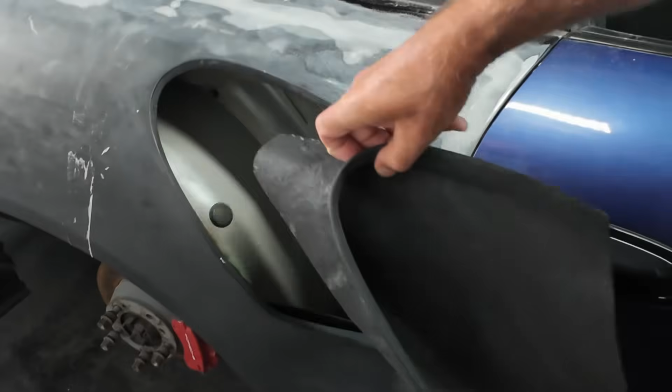And this is my list. Now, I can't write to save my life, so sorry about the scribbling here, but I can read it. So I've got a few things crossed off. We've seen them in previous videos. So at the moment, I need to bond in the air intake. So these are these things here, which go on the side rear quarters. Now I can't do that until I get them back from the body shop. These are going to be done in a satin black, and I'll bond them in, but I just need to make sure they fit correctly. So I've got a little bit of work on them just to make sure they're fitting nicely before I give them to the body shop.

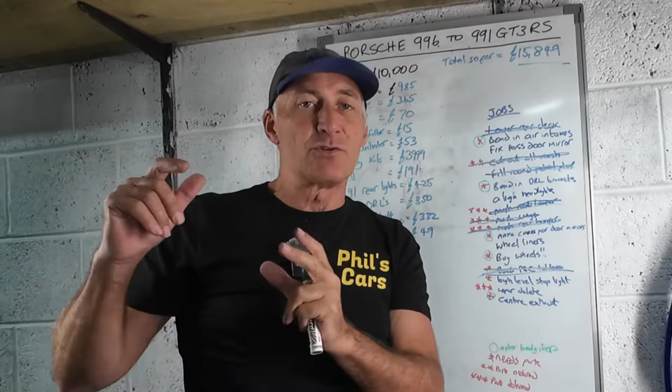Now I've got fix passenger door mirror. That's just a little bit of work I've got to do on the passenger door mirror. It's just a little bit wobbly. The bracket I made for those, if you remember, look back for a previous episode, is really good on the driver's side, but just a little bit wobbly on the passenger side. So I just need a little bit of bend in that bracket, and that should fix that issue. Bonding the DRL brackets. Now I mentioned that when I was looking at the front bumper, I'm not going to bond them in until I come back from body shop, because they'll just be in the way of them spraying the bumper.

Align headlights. Well, I've been waiting for this. I needed to get the long 997 type tool that is used to insert and remove the headlights. The one you get with 996 is shorter. If you remember, 996 headlights have the runny egg part, so they are a bit wider than 997, so you need a shorter tool, and that didn't work on this car because I've got 997 type headlights on it. But I do have that tool, and that's one job I can do.

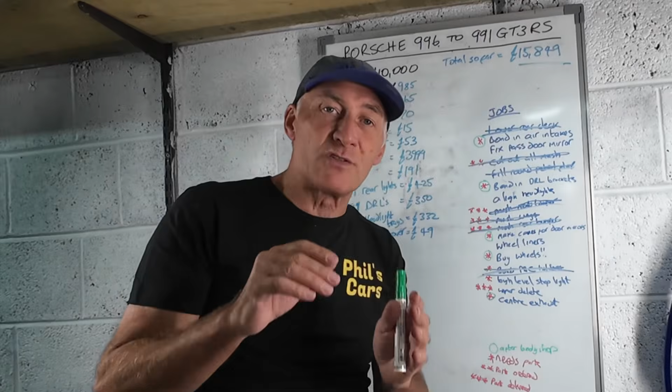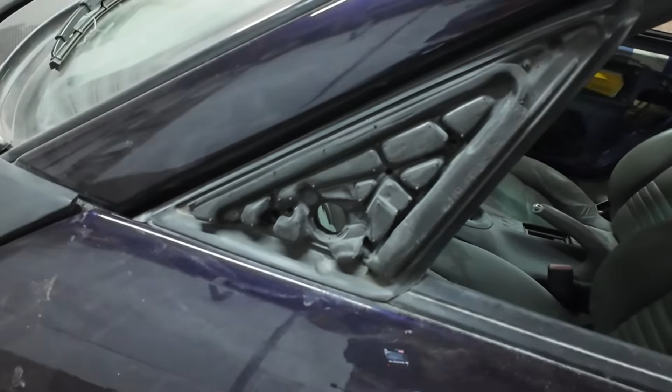I've got make covers for the door mirrors, so this is where the original door mirrors went on the car. I need to make some little perspex covers that go over them and give them again to the body shop to do satin black. Now I haven't bought that perspex yet. I'm still looking at that, and that's going to be a job just a little bit in the future, but I've still got plenty of weeks left to do that.

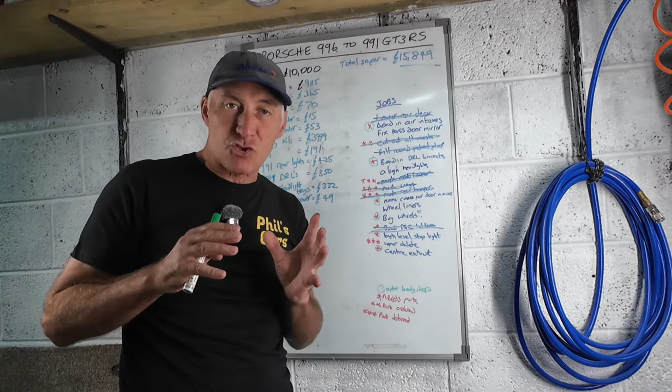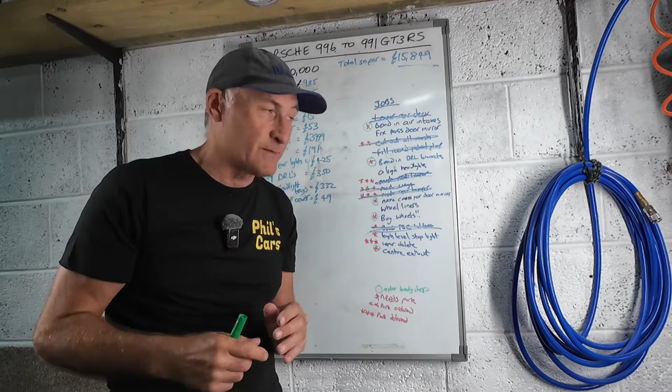Wheel liners. Now I do need to get the wheel liners out of my storage and try them on this car just to see what they're going to work like, because again, if they're a bit short, I may need to use some thinner perspex to elongate those, make them a little bit longer so they come to the wheel arches. Buy wheels, that's a big one there. I'm still debating which wheels to get. I'm not in a hurry at the moment because I can bang on the original wheels to get this to the body shop, so that'll be a post body shop job.

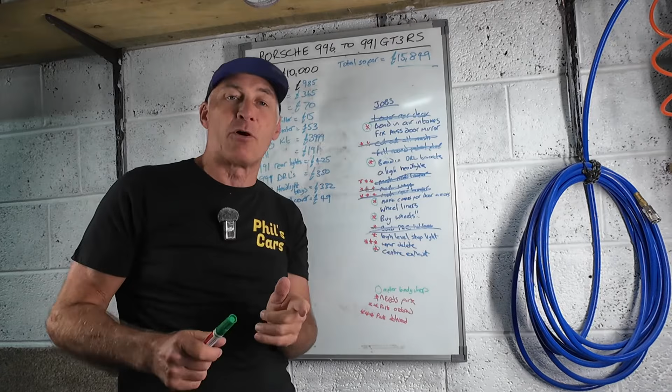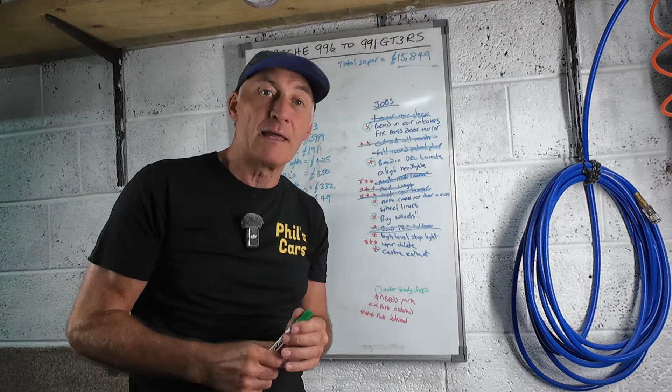High level stoplight. Now that fits into the wing and it is a different shape to the standard 996 high level stoplight. I've contacted the makers of the kit to ask them what stoplight is supposed to fit in there, because the 996 one doesn't. I'm waiting for their reply. Hopefully they'll just tell me which one it is, I go buy one and it fits perfectly in there. I'll just have to do a little bit of wiring. Wiper delete. Now this is a job I forgot about, to be honest, so I just read my board.

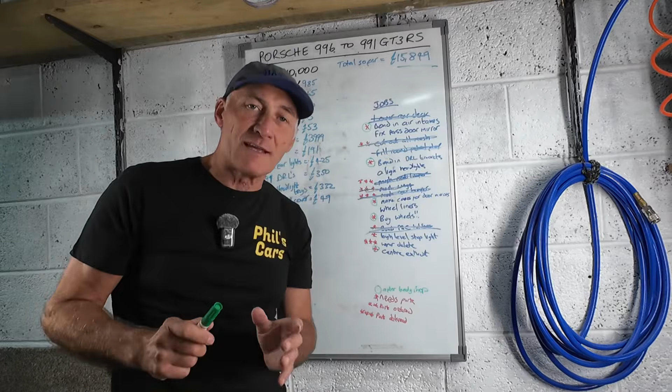So I'm removing the rear wiper on this car because you don't have one of them on a GT3 RS. So that's another little job we can get done hopefully in this video and get that prepped for the body shop. And the last one on my list here is centre exhaust. So we're going to drive this car to an exhaust manufacturer in this area who can actually make one for me while I kind of stand there and wait. So that's again a post body shop job, I am thinking.

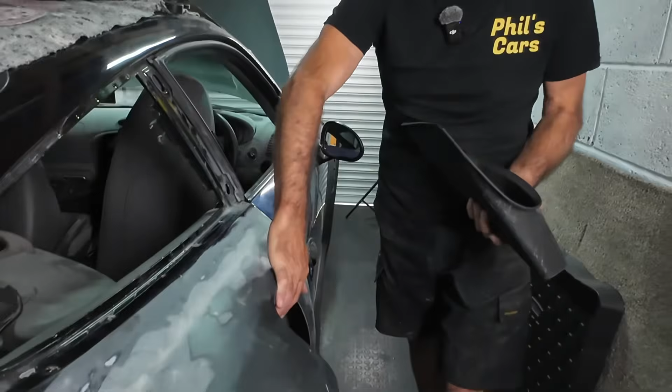So there we go. I've got a list of jobs that I can be doing on this car, hopefully in this video, to get it that one step nearer to the body shop. And now let's have a look at these air intakes. Now, two jobs to do on these. One, I've got to make sure they just fit nicely onto the hole in the actual panel here, and two, they've got a big hole in them.

So I'm really going to have to seal up that hole because I don't want anything going in here, because if anything goes through there, it's going to end up inside my rear wheel arch. So that is going to have to be sealed. And when I bond these on, I'm going to have to bond all the way around to make sure they seal this hole up. But initially, let's just try the fitment.

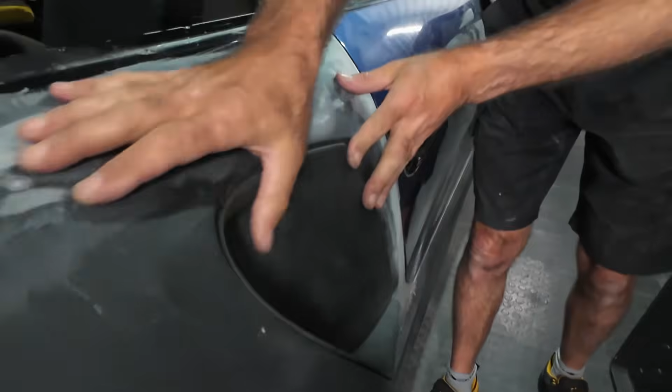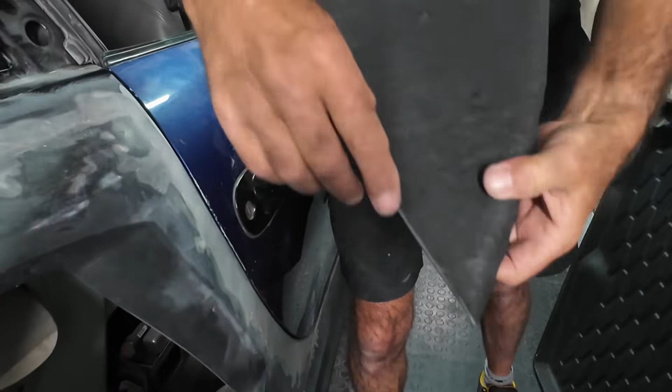So fitting them in, they do fit fairly well, but what we do have is a problem down here. This is sticking out, just sticking out a little bit at the end here. And what it is, on the inside of this there's just a little bit of a raised edge, so I'm just going to sand that down a little bit. I'm going to mess around with this just so it fits nicely.

So what I'm going to do now, I'm just going to get some clamps and do some test clamping of how I'm going to do this when it's come back from the body shop, because I can't bond these on until after they've painted the rear quarters. Otherwise they'll just be in the way, because these need to be a satin black colour, so they're going to have to be painted separately. So let me get my clamps and we'll test clamp this.

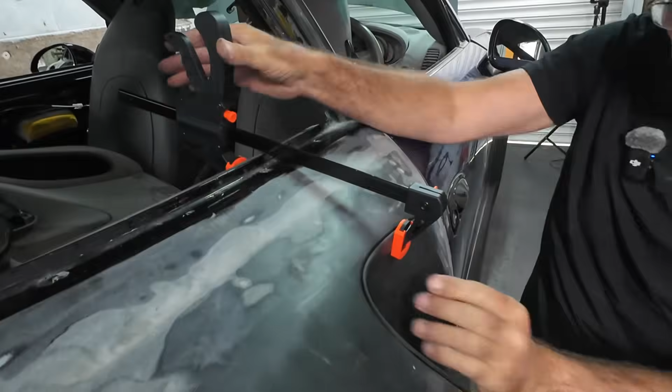Quite happy there. I think that's looking okay. And what I'll do, I'll probably put a piece of wood on the day between there and there, just to push that in to get the good bond at this side as well. That's that side, happy with that. So when we get back from the paint shop, we can bond that on. Let's go check the other side.

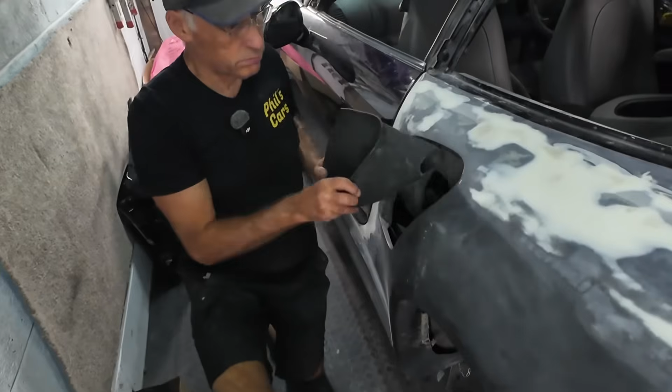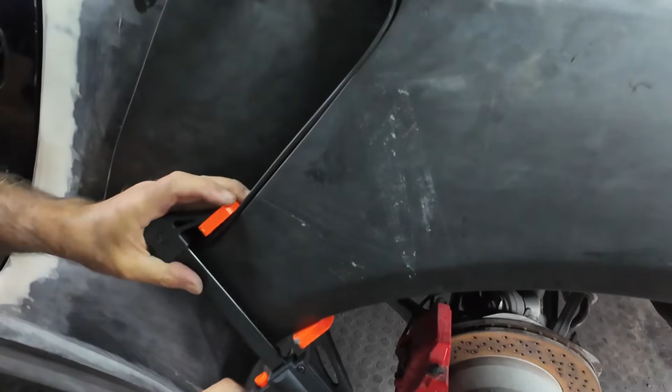Yeah, fits a lot better, I think. Yeah. And that's that one done as well. Happy with those now. So that's another job ticked off the list. On to the next one.

Right, so this is the job I've been putting off for a long time now, and that's looking at these headlights, because they're a bit of a pain in the backside. But I did manage to get the tool, which is a 997 headlight tool, because obviously these are more like 997 headlights now, and the one that you get with the car is only about that long and will not work on these headlights.

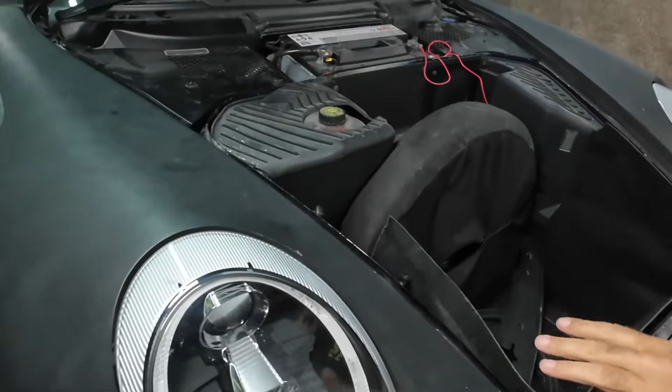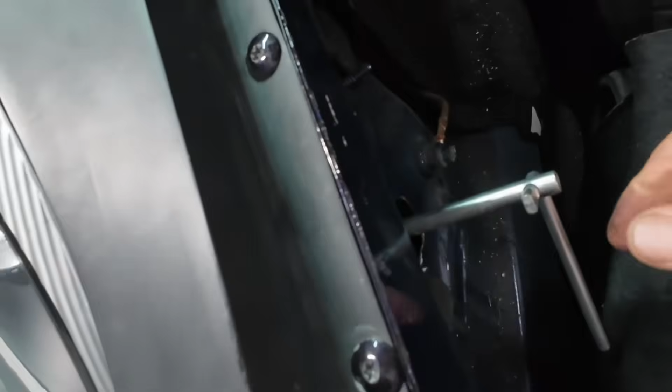Now, I had a little play off camera, and I've managed to get this one headlight here fitting absolutely perfectly. So that does fit nicely, and the tool does work. So the tool does fit into there, and you can get it on and you can release these lights and you can pop them in and out. But as for this one, it's a pain in the backside. This is the closest I can get this up to now.

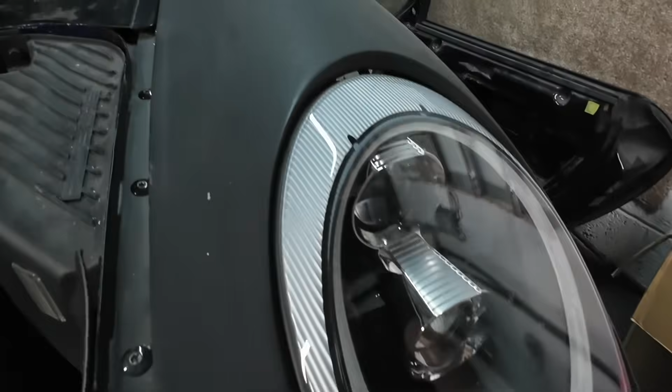I don't know what's gone on here. I just need to mess around with it and get this fitting better. So I'm gonna have a little play around with that and see if I can get this fitting better, and then when I do, I'll show you the results on camera. Three hours later. Oh my God! After about three hours, and I mean three hours, I've now got these lights lined up.

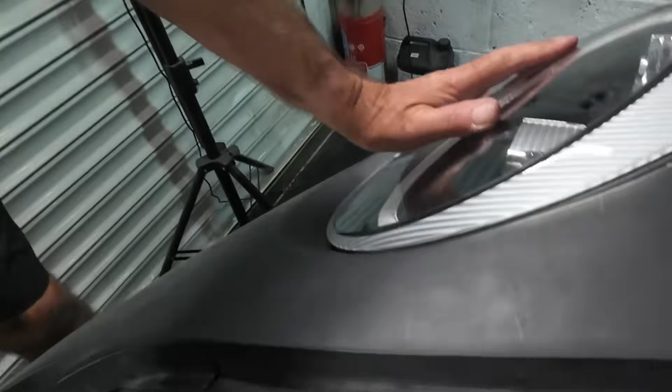It took a lot of faffing about with these little light trays on the inner part of the wing. But let me show you on this light over there how it works correctly, as it should on a real Porsche 911. So using the correct tool for a 997, we can see that if we just give it a turn, you hear that snap sound, which is what you want to hear. And if you turn it a bit further, it pops the headlight out just like it does on the real one.

And to put this back together again, all we need to do is push it right home and turn the tool until you get that snapping sound. And that snapping sound makes me very happy, because now everything's working on the front, the lights are fitting nicely, and the lights themselves all work, main beam and high beam as well. Absolute great job, so pleased with this one. So that's that job done.

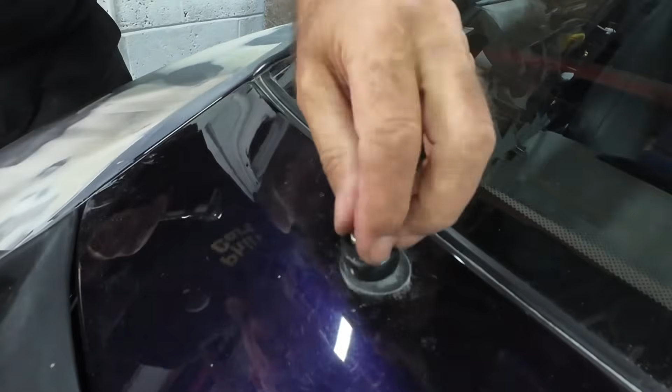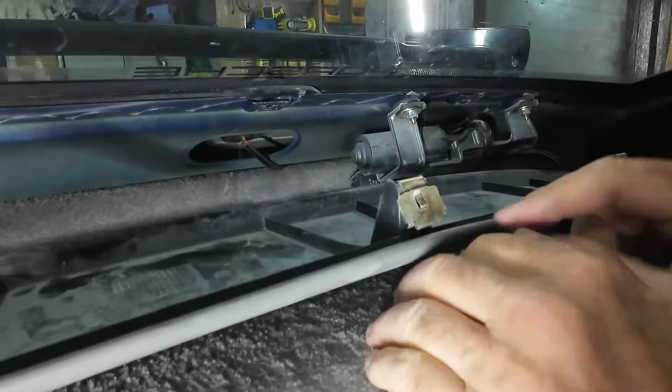So now I'm going to use this little thing here to get rid of this rear wiper. And we begin by removing the wiper. So the next job is inside the car. All you need to do to remove this rear panel is to just get your fingers under this edge here and pull it towards you. And there's a bunch of clips that should pop, and then it comes off like that. These are the clips here. Now these clips should remain inside this part here. If they don't, all you need to do is pop each of these clips off and just pop them back in where they came from.

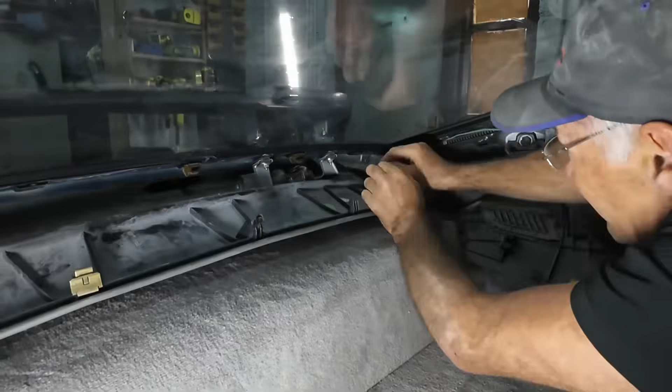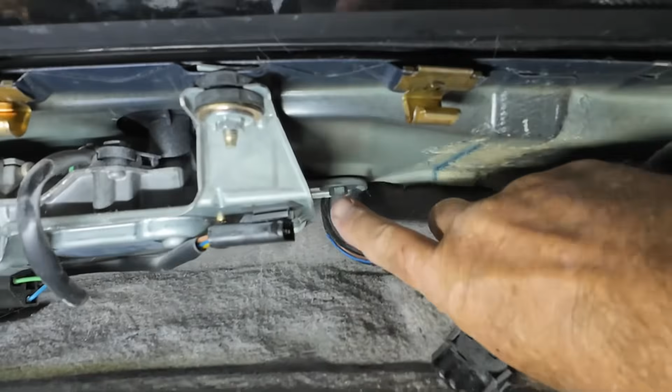And that now reveals our wiper motor in this position here. So what we can do is we can unplug the actual motor itself. And what we need to remove is 3 bolts, one there, and the third one is just tucked in the back down there. We've got to get this spindle out of the hole. So if we just get it off this side here, rotate it forward, and you should now be able to just tilt it, and she should come out.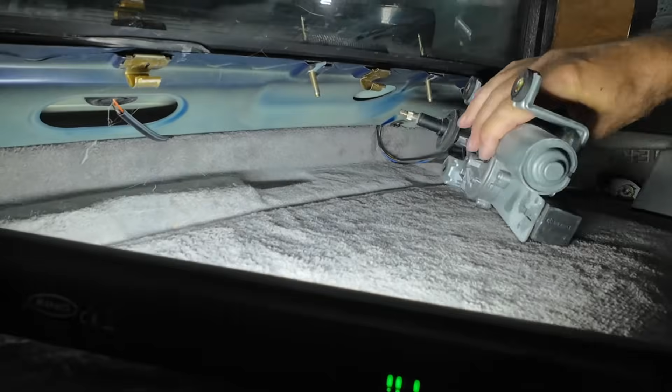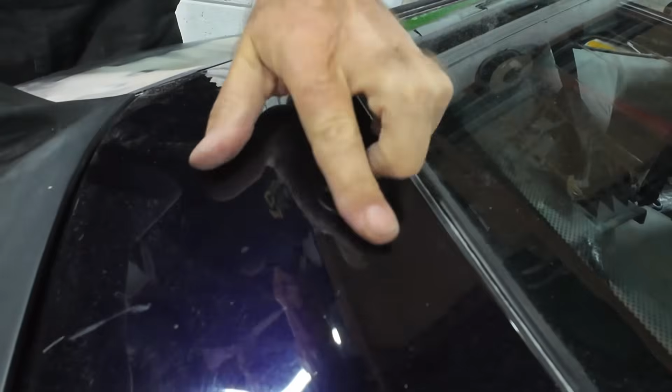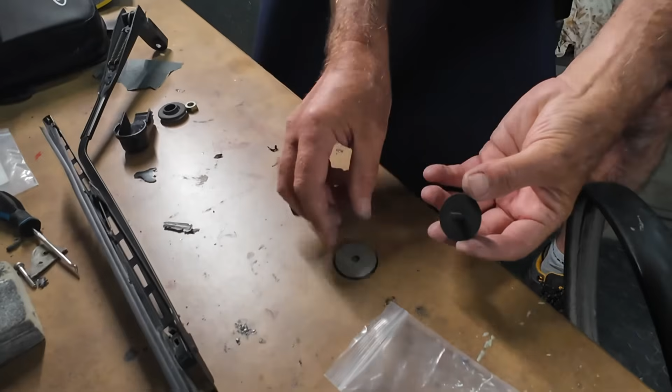Back on the outside, let's get this bit sorted. So first of all, you're left with this rubber grommet, so we need to remove that because we don't need that grommet anymore. And that now leaves you with that hole, which we need to fill. And that's where this kit comes in handy. So what you get in this kit is the blanking plate, so that's going to go from the outside. This is going to go on the inside, like so, with the rubber grommet and then the metal washer, and then it's all going to be locked together with this nut on the end.

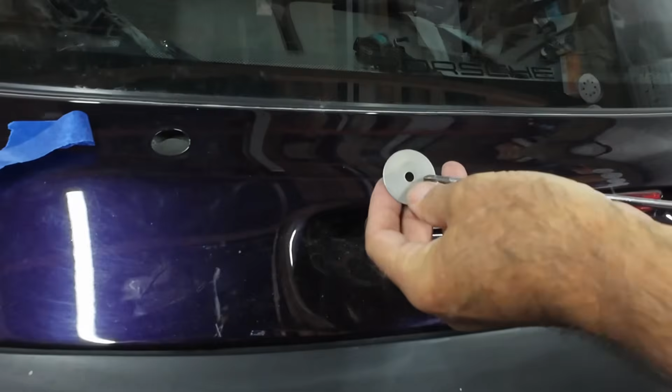Right, if you look here, this obviously is the hole where the wiper was, but inside you've got this inner skin here. Now, looking at this washer that I get supplied, that will not go inside that inner skin. So we've had to devise a cunning plan. I have a cunning plan. And this is what we're thinking. If we remove this higher level brake light, with the use of a long screwdriver like so, we should be able to attach the washer to the end, poke it through there and hold it just underneath that hole. So step number 1 is we need to remove this rear light.

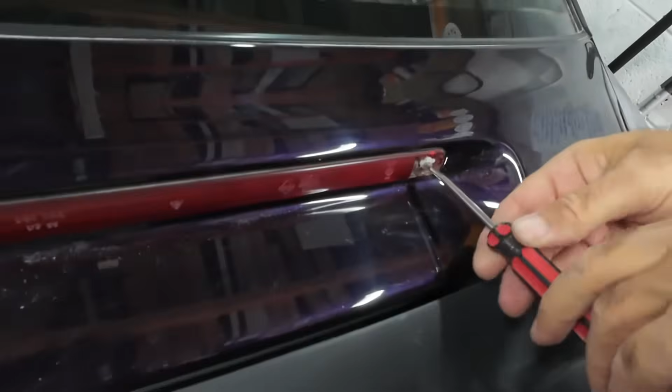Well, that's easily done. All we need to do is, using a pick, remove this plastic cover, and using a flat screwdriver, just twist this 90 degrees, and then again use a pick to go in this hole that's provided here and pull it out, and that comes off nice and easily. Remove the wiring and get that out of the way. Now the theory was this screwdriver, if I push that in there now, as you can see, that does appear in the hole there. So I think we're on a winner. Winner, winner, chicken dinner! So next job is we need to tape this washer onto the end of that screwdriver.

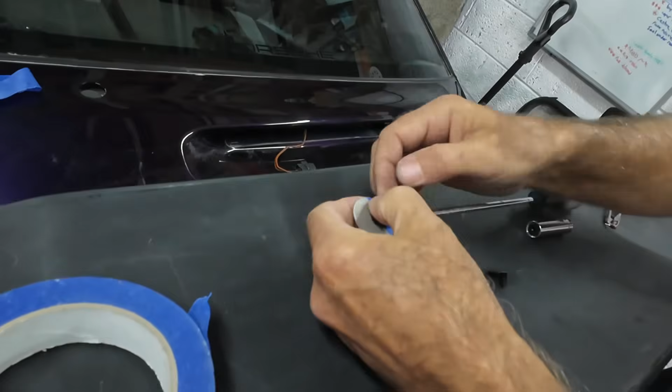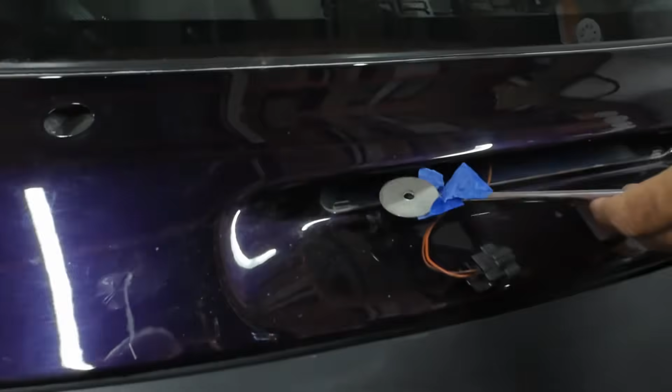Right, so test number one. Let's just see if that, turned the other way up, will go towards the hole we need it to be. Yes! I can now assemble the two parts like so to go through that hole. And now if I go inside now, hopefully I should be able to offer that up and we can get this tightened up. Here we go.

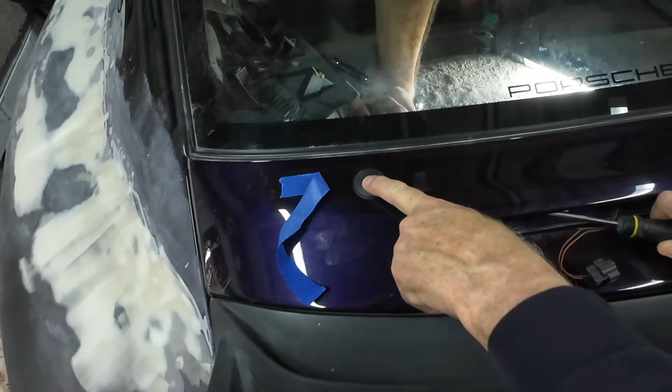And now the theory is, if we just remove this screwdriver, it should bring out the tape. Whoa! And there we go, so that's the blanking plate in place. So now what we need to do is go back inside and replace that rear panel. I'm just gonna lay that in a position where it's opposite each one of these.

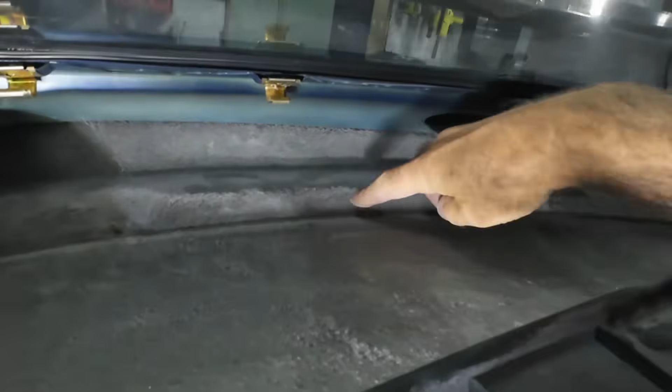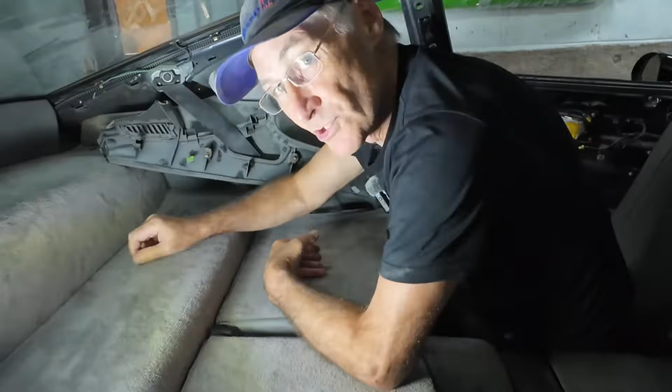You also have a defined ledge here where the bottom of the panel goes into. So therefore it should be dead simple by just lining it up exactly where it came out of, like so, and pressing it back. Job's a good one. And that's it, so now we have the rear wiper deleted, and this makes the rear end of this car look a lot more sporty, as it should do.

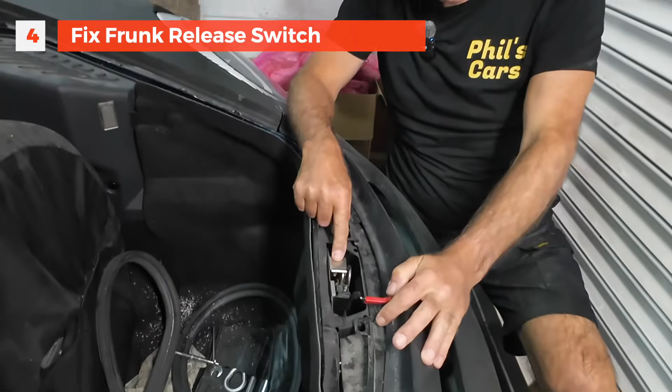So next job on my list was try and get this frunk release working, because for some reason it's just not working from the switch. So I've got to try and diagnose and find out why this isn't working. So let's check it out. First of all, I need to get to the mechanism, and that means removing this part of the frunk. So let's remove this cover so we'll get better access.

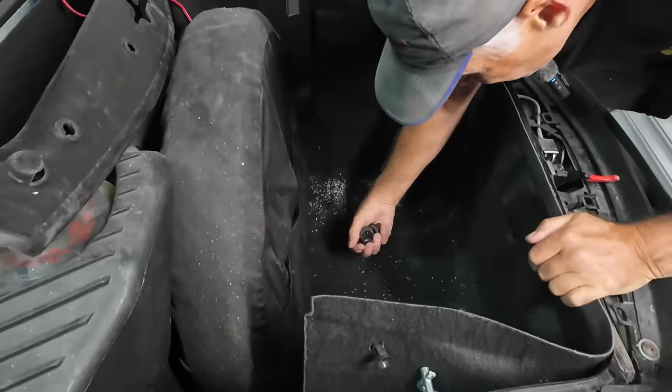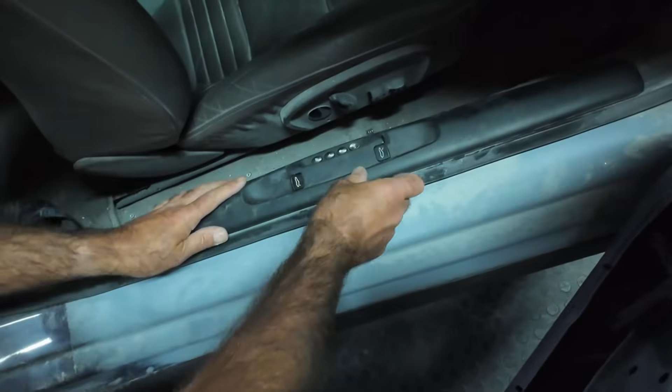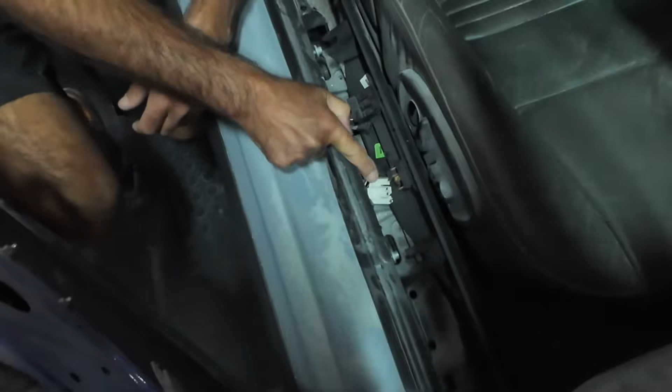This gives access to the mechanism here, which is all part of that frunk. Right, so obviously this is controlled by the panel here. I just want to make sure where this was plugged in. So I'll just remove this and we'll have a look. Oh, you are kidding me. Oh, brilliant, look at this. What an idiot, what an idiot. This is not plugged in. Don't tell me this is going to work. Could this be one of the easiest fixes I've ever done?

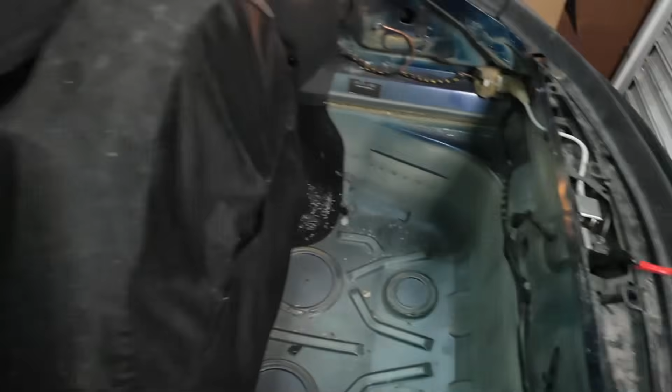Let's try. Plug that in. Have a listen. Are you ready, everybody listening? Can you hear that? Oh my word. We are on. Right, let's see if that button now releases the frunk. Yep, let's come up on it. And it has. Look at that. She is released. Well, I've got to say, for once, that's one of the easiest fixes I've ever done on this car. On to the next job.

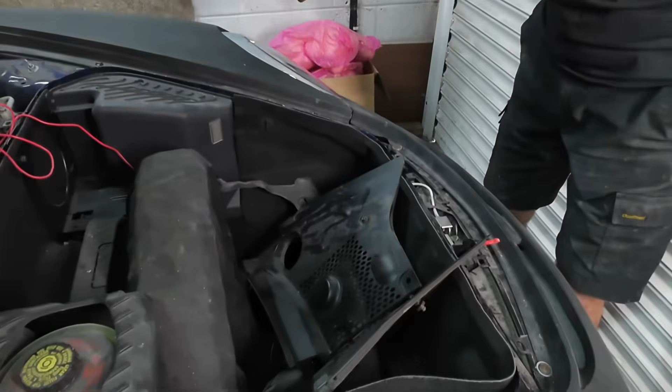So having now put all this back after fixing the front clip, I remember I've got all of these panels here, which are the ones that go under the bonnet over there. And these all need to be test fitted, so let's see if we can get these fitted and just see what we need to do.

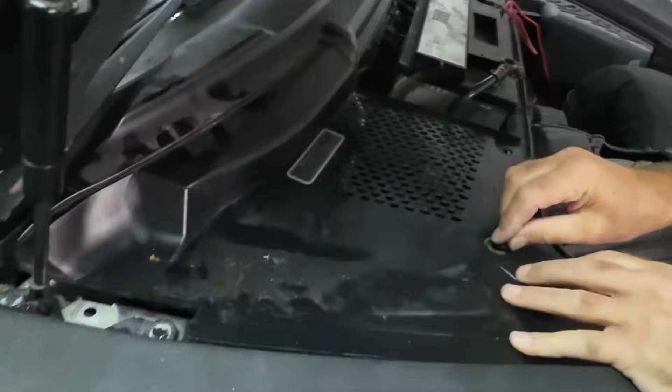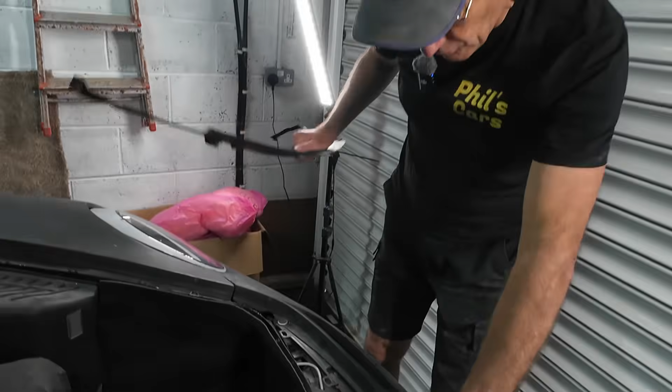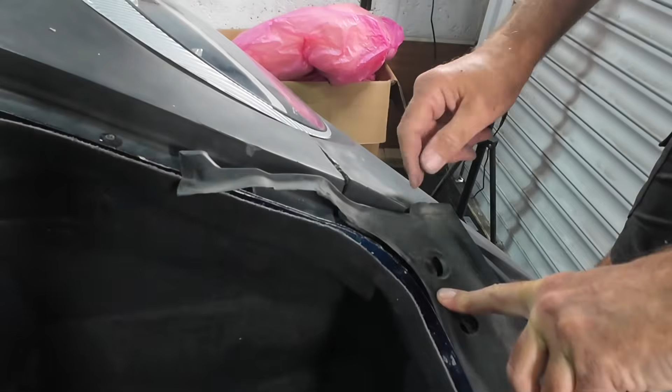So now we come on to this panel, which is going to cover all of this area here. Now, this is obviously from a 996 and ain't going to fit perfectly with this 991 front bumper, but you know what? It fits quite well, but this bit here went up the 996 wings, so I think I'm going to chop it off there, so it just goes level with the end of my wing here, and we may need to take a little bit off round here just to get it round that corner. So let's mark that up with my pen and we'll get chopping.

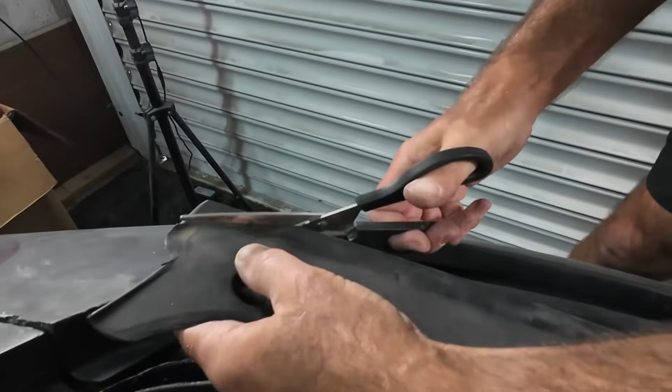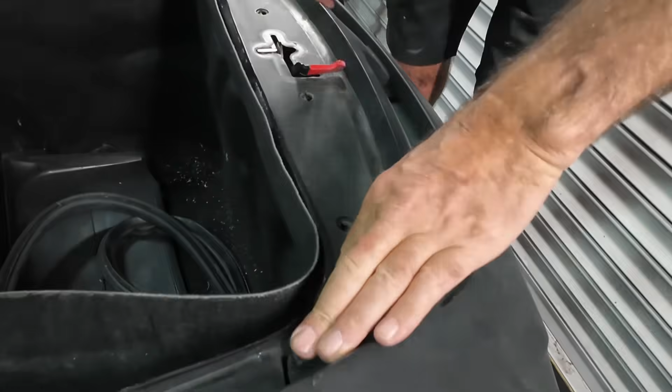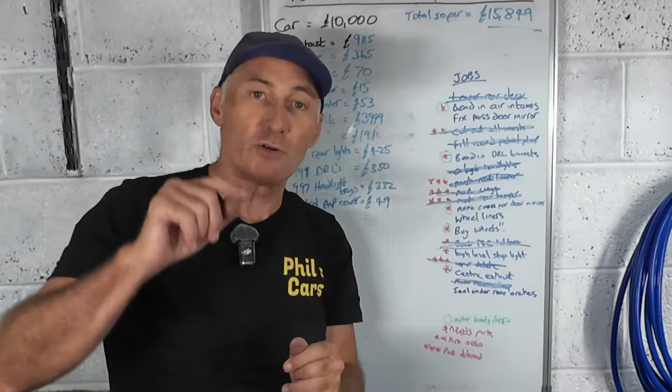Right, there we go, that's another job ticked off. Right then, back to the board. Look at all the crossouts we've got now. Absolutely fantastic. So I've only got a few things left on there, and some of those are post body shop, so I can't do them now. But I think maybe one more video on this before it goes to body shop, where we just actually finish off the final little things.